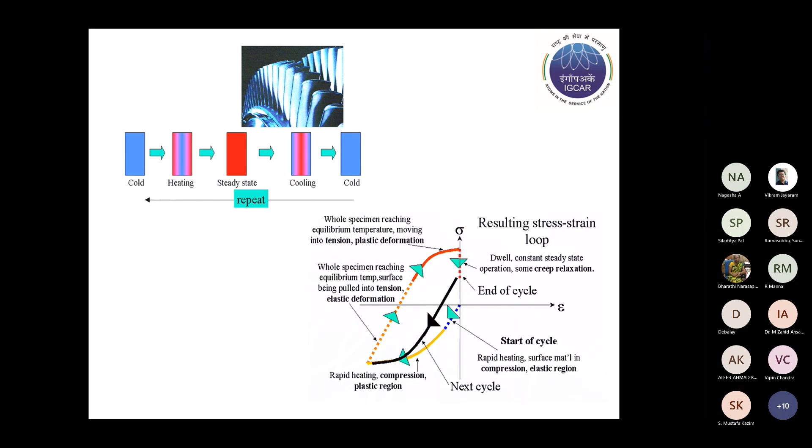At the end of the cycle, at the beginning of the next cycle, the same thing gets repeated, building up a stress-strain hysteresis loop. This is the low cycle fatigue damage that happens during the startup and shutdown cycle of this component. So next, low cycle fatigue.

I don't know why it is continuously changing.

The subject of low cycle fatigue can be broadly classified into two, depending on the temperature of testing. Generally, conventional testing for generating design-related data for high temperature structural materials exposed to fatigue in service relies on isothermal database generated at constant temperature.

Normally, if a structure goes from a minimum temperature to a maximum temperature, the data for design relies on results obtained from the peak or maximum temperature of cycling. The underlying assumption is that the peak maximum temperature cyclic data would give rise to a conservative life estimation.

However, in the recent past, several studies have established that this need not necessarily be a conservative design approach. Hence, there has been a stress in recent years to generate data considering the temperature cycling that is actually happening in service.

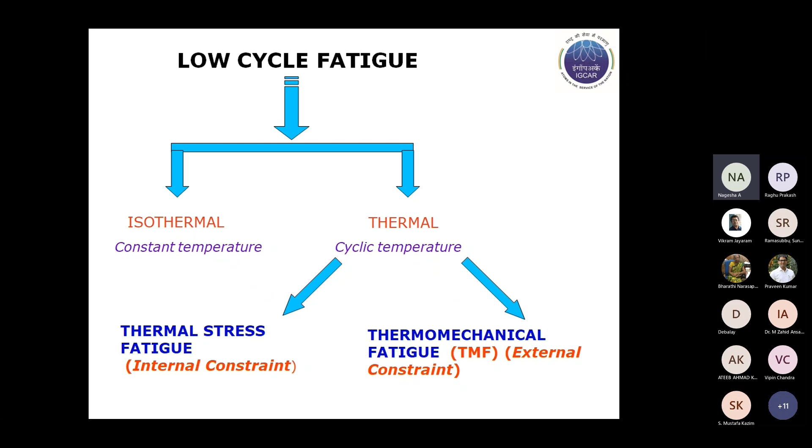So this is a definition, for the sake of completion: it is a gradual deterioration and eventual cracking of material by alternate heating and cooling, during which free thermal expansion and contraction is partially or completely constrained. So as I said, internal or external.

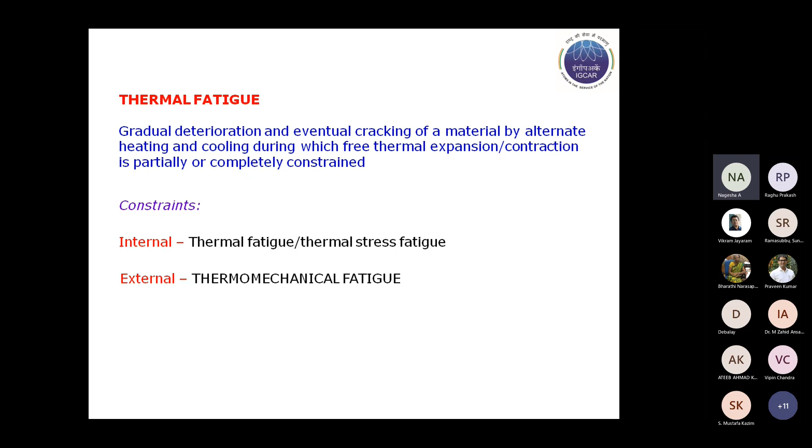Internal constraint is what is happening in the actual thermal fatigue situation. This is also called thermal stress fatigue. And external constraints is the case in thermomechanical fatigue.

So the earliest studies related to thermal fatigue are credited mainly to Glenny and Taylor, where Glenny devised a specific testing technique - this is like turbine blade testing for thermal fatigue. This kind of thing is called Glenny's discs.

And there is a fluidized bed testing facility which was employed for this kind of test, wherein the sample is shifted repeatedly from a high temperature region to a low temperature region. This kind of test is a little bit complex testing setup, and there are drawbacks in measurement of both stress and strain, which is not that simple, because it might require a lot of computational analysis.

Another important drawback is that results obtained from such tests cannot be expressed in a quantitative manner. One can get results related only to a particular specific test specimen or for specific situations. It cannot be used for generating the generic database of thermal fatigue.

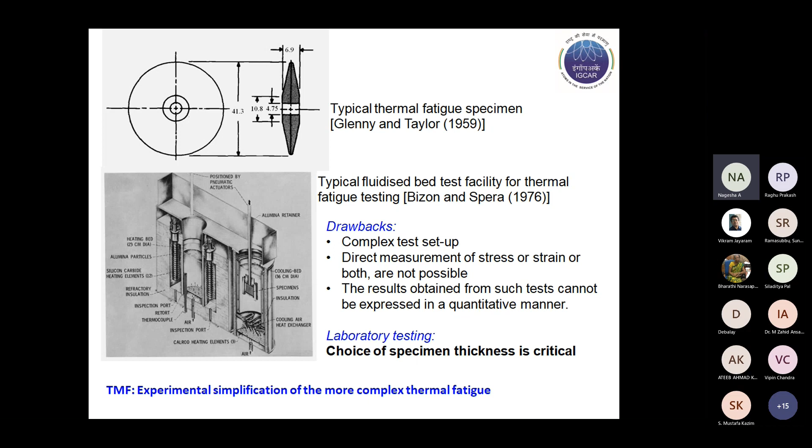So experimental simplification of the more complex fatigue is through the TMF. While carrying out the TMF, there are two extreme and basic temperature strain temperature waveforms deployed.

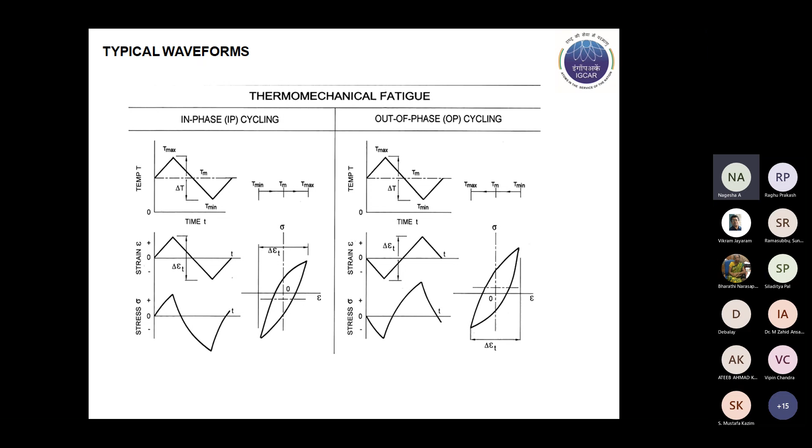One is called IP cycling, wherein with temperature increase, we have the strain going from peak compressive strain to peak tensile, whereas out of phase is the exactly opposite kind of situation. In practice, there could be a different phasing relationship between the strain and temperature in service.

For example, this could be representative of the volume element of any high temperature component. In this case, maybe you can say it is a liquid metal cooled fast reactor pressure vessel, wherein on the outside surface we see an in-phase

Hello? It is not changing.

Is that a heavy slide? Oh, okay.

Okay, so it keeps changing. I do not know really why it is happening.

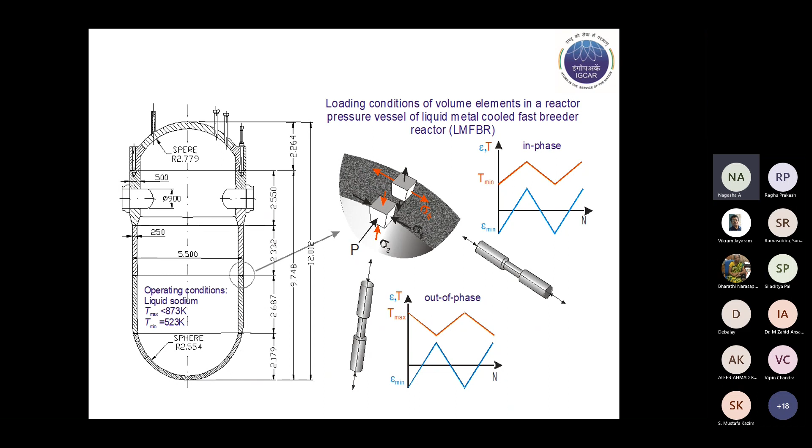It is like in creep-fatigue interaction, where tensile and peak compressive holds are normally investigated. Similarly, in thermomechanical fatigue, it is the in-phase and out-of-phase cyclic waveforms that are normally investigated.

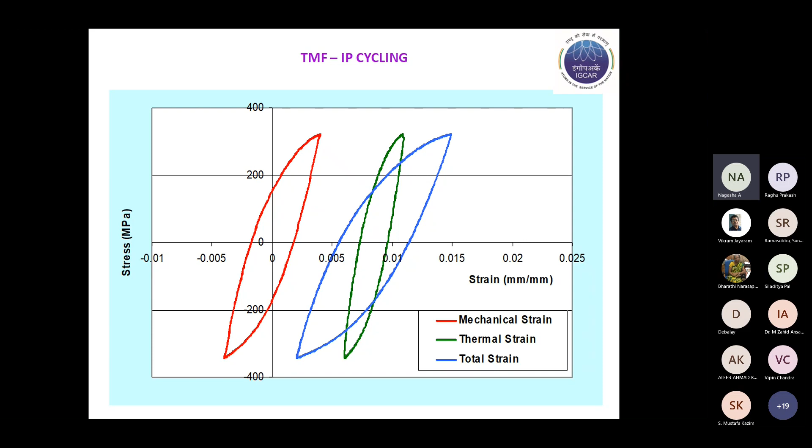As you have seen in the previous slide, this is the in-phase TMF, wherein we have this red hysteresis loop. The mechanical strain is shown in red, the thermal strain is shown in green, and the total strain is shown in blue. Since it is all in phase, we can see that the total strain is the sum of the mechanical and thermal strain.

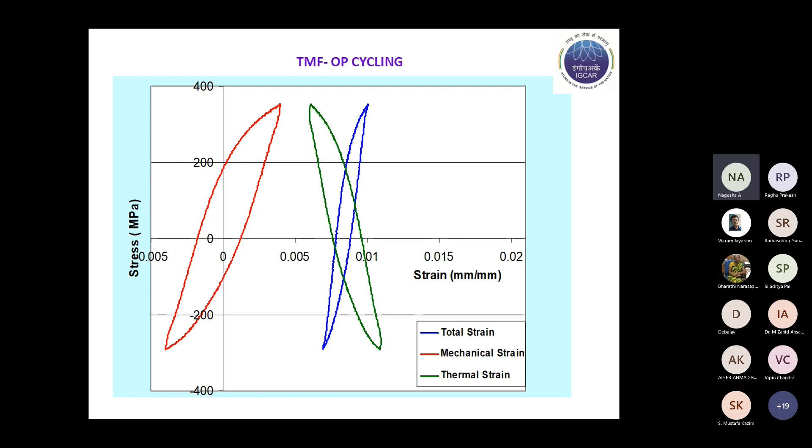In the case of out-of-phase, this is a typical hysteresis loop wherein you see that the temperature and mechanical strain are completely out of phase with each other, and the total strain is also given.

A typical test setup that was used. I'll just give a brief outline about some of our tests carried out on ferritic and austenitic stainless steel, including the weld joints also. This is the typical test setup that was used.

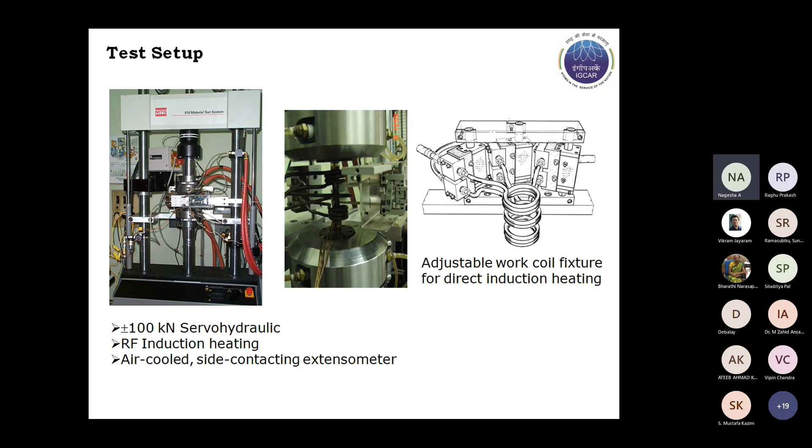We have used a 100 kN servohydraulic testing machine equipped with RF induction heating. For controlling the temperature, for easy control, a three-segmented coil arrangement was used, through which the temperature was maintained within 2 to 3 degree dynamic temperature gradients along the length of the sample.

The type of sample used, normally for TMF one uses a thin sample or a hollow or tubular kind of sample with a very small wall thickness.

In our case, we have used samples with a wall thickness of about 1.4 mm, so that the radial temperature gradients are kept to a minimum, and a gauge length of 25 mm was selected. In the gauge length, dynamic temperature gradients were kept to a minimum, within about 5 degrees throughout the test.

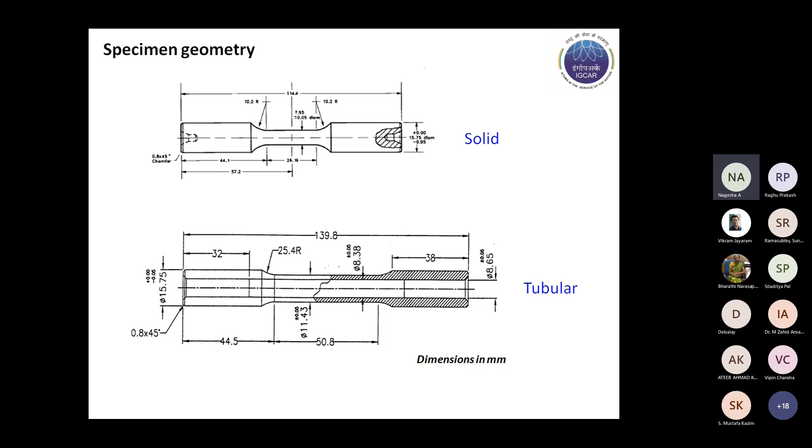When we are doing a completely reversed mechanical strain-controlled TMF test, one needs to compensate for the temperature-induced strain.

This is in practice done in different ways, but mostly time-based and temperature-based compensation procedures are used.

Time-based employs pre-recorded thermal strain versus time, which is constantly accessed during the course of TMF cycling to obtain the real-time thermal strain component. But this kind of approach can possibly lead to control errors if temperature variations are seen; even small variations cycle to cycle can give rise to problems or disturbance in this approach.

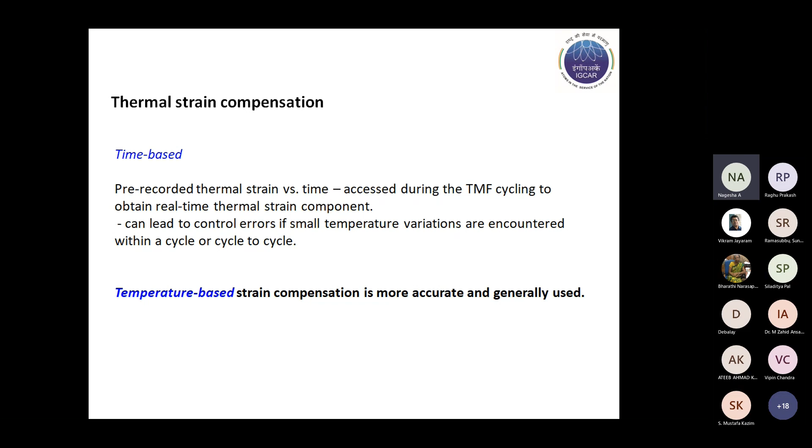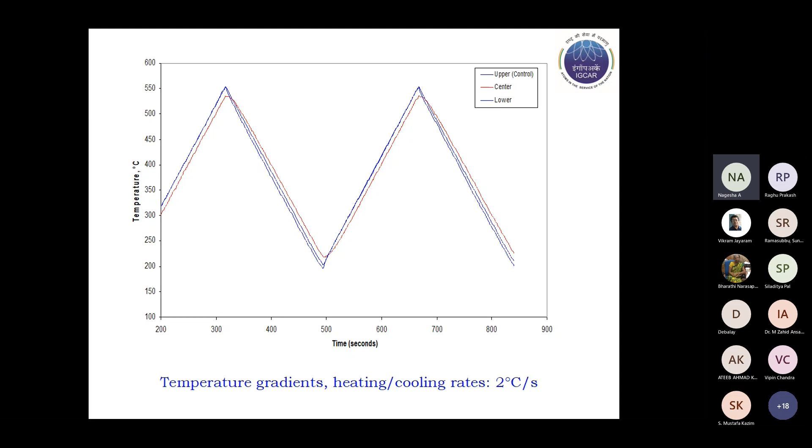So in practice, normally what is used is the temperature-based strain compensation, which is generally more accurate and most commonly used. This is a temperature versus time waveform that we have got on our material.

However, if too much temperature variation is there along the gauge length, then we can get a lot of distortion in the hysteresis loop, where from region to region there could be different local strain happening.

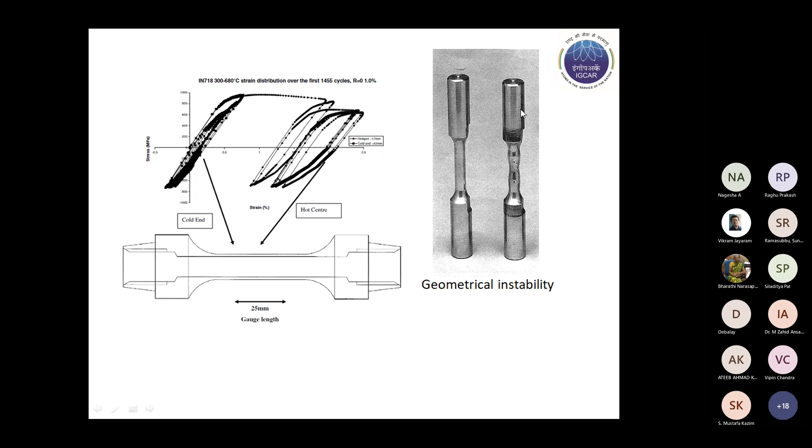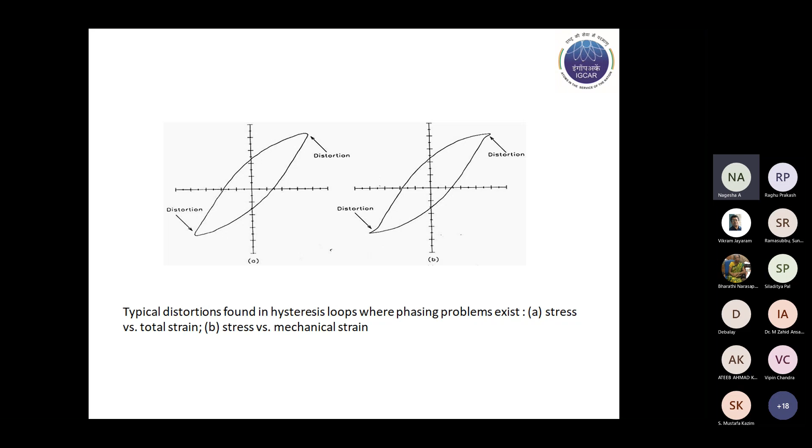So this kind of distortion also manifests in the hysteresis loops, wherein tips can be seen to be either blunted or heavily distorted.

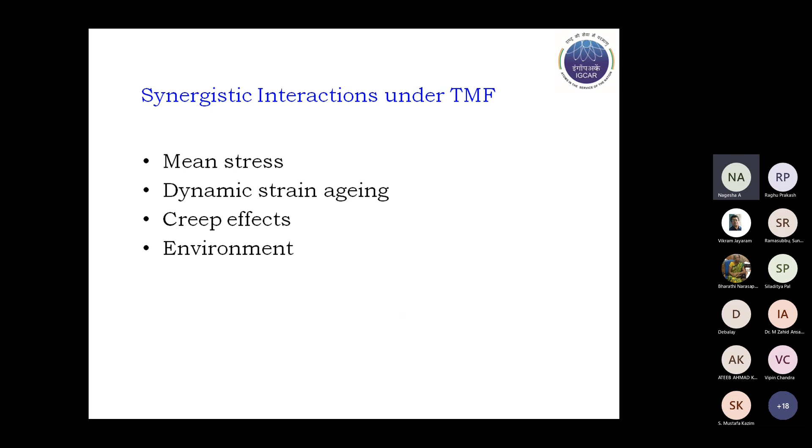So what we have studied, we have given stress on different aspects during the testing - factors such as mean stress, dynamic strain aging, creep effects, and environmental effects, etc., have been investigated systematically.

IP and OP are the most basic and most normally investigated waveforms under TMF. Depending on how the life variation happens between IP and OP, there are different types of cases - mainly 3-4 types.

Type I, wherein IP or in-phase loading gives rise to lower cyclic lifetimes compared to OP. The predominant damage here is creep, because maximum temperature coincides with peak tensile strain. So when creep damage becomes more prominent, this Type 1 situation happens where IP loading gives rise to a lower cyclic life compared to OP.

Whereas in situations when environmental effects predominate, the situation becomes reverse - OP TMF tends to give rise to lower life compared to IP.

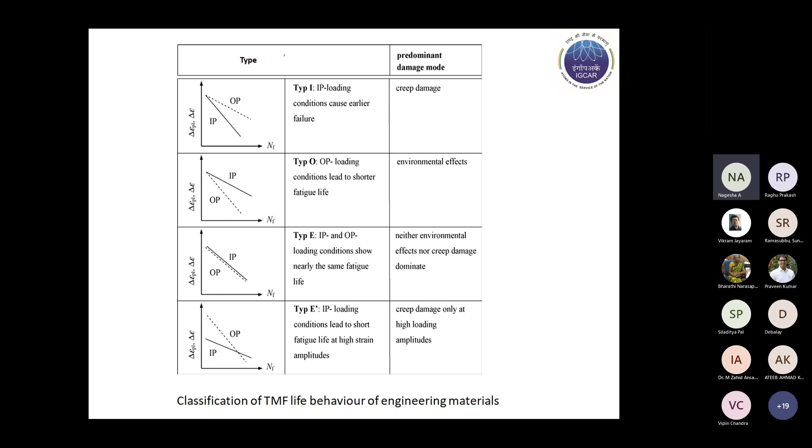There are other two types wherein IP and OP almost give rise to similar lifetimes, where neither environmental factors nor creep damage dominate. And another type of variation called E prime, where IP loading conditions give rise to shorter life compared to OP, and the creep damage occurs only at the high loading amplitudes.

So I'll give some important results which we have obtained on austenitic stainless steel, base metal and weld joints, and ferritic 9 chrome varieties of steels.

We have investigated 9 chrome moly steel and reduced activation ferritic martensitic steel, which are respectively used - 9 chrome moly steel is the material for the steam generator components of fast reactor, whereas there is another type of similar steel which I'll come to a little while later.

In both of these materials, we have carried out IP and OP-TMF tests, and the strain rates employed compared to isothermal cycling are far lower - about a couple of orders of magnitude lower in the case of thermomechanical loading, because of the requirement of temperature cycling and minimization of temperature gradients. This limits the maximum strain rate that can be employed.

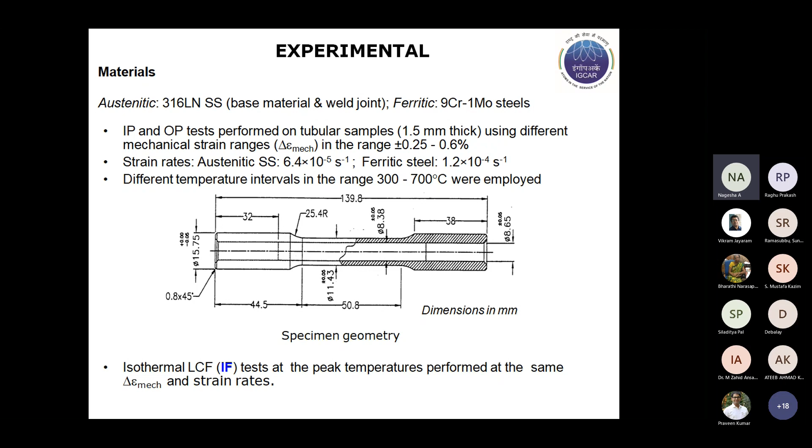In my presentation, I will use the term IF cycling to denote the isothermal testing. So when I'm comparing this isothermal testing, I would always compare it with respect to the maximum temperature of the TMF.

Strain compensation was done using a procedure wherein the free thermal expansion under zero load during the initial ramp from ambient temperature to Tmax was enabled, and thermal cycling was introduced between minimum and maximum temperature, allowing free expansion and contraction of the specimen. So the strain recorded by the extensometer is the pure thermal strain, obtained as a function of temperature, and the strain-temperature relationship was established and used to continuously calculate and control thermal strain during the test.

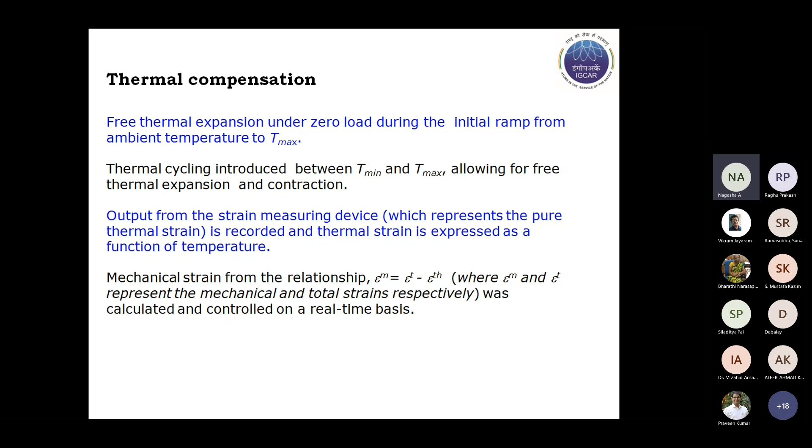From the total strain sensed by the extensometer, the thermal component was calculated and continuously subtracted, and the remaining part - total minus thermal strain, that is the mechanical strain - was continuously recorded, calculated and controlled on a real-time basis during the test.

Compared to isothermal cycling, there is an additional degree of imbalance on the stress-strain hysteresis loop compared to the situation under isothermal condition.

Under isothermal condition, the tensile and compressive parts of the stress-strain hysteresis loop would be symmetrical, but in the case of thermal TMF, there is an asymmetry in the tensile and compressive parts because of the differing temperatures during the tension and compression strain of the cycle.

During the high temperature part of the cycle, the material will be deformed by plasticity and creep, provided the maximum temperature is high enough. But this deformation is applied to material that has just undergone half a cycle of cold working during the lower temperature deformation, which makes the material a little bit stronger in the tensile part compared to what happens in isothermal cyclic loading - so the flow response will be higher.

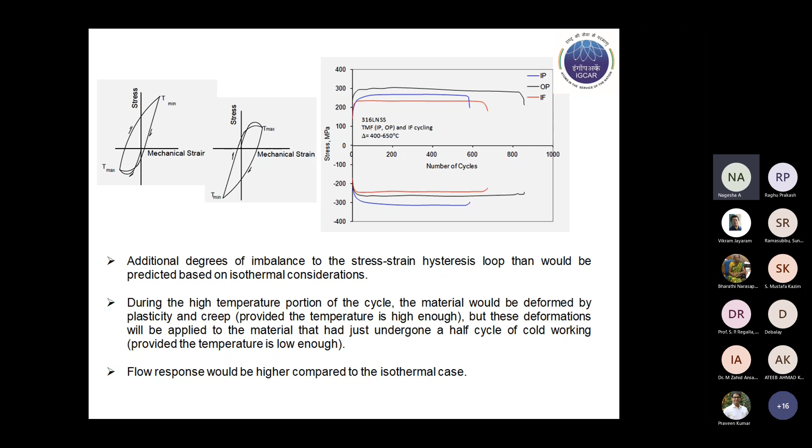Higher compared to the isothermal case, and similarly in the lower temperature part, because the temperature is lower, it will make it stronger in the compressive part also. So both the compressive and tensile parts, the response stress will be seen to be higher compared to the isothermal equivalent test at the maximum temperature of cycling.

This typical results from the IP and OP TMF are shown here, and we can see from this figure the mean stress variation because of the temperature difference.

Normally the out-of-phase TMF leads to a tensile mean stress, as against the compressive mean stress observed under IP cycling. The compressive mean stress under IP cycling occurs since the compressive deformation is taking place at the lower temperature, giving rise to higher stress compared to the lower stress happening at the maximum temperature during IP cycling.

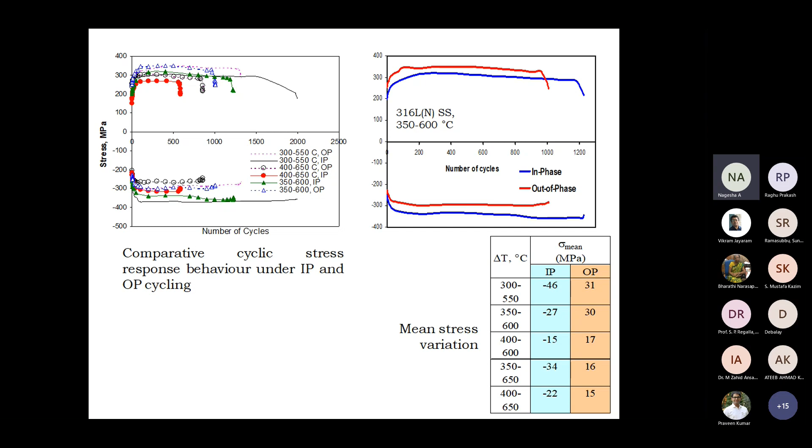So this sets up a tensile mean stress under OP because we have a cold lower temperature coinciding with peak tensile loading. So OP gives rise to tensile mean stress, and IP gives rise to compressive mean stress. This has a bearing on the life variation as well.

When we plot the cyclic life versus maximum temperature, we see that below a temperature of about 650 degrees centigrade, out-of-phase led to a lower cyclic life compared to in-phase. Whereas with increase in temperature beyond 650 degrees centigrade, in-phase TMF gives rise to a lower life compared to OP. What is happening is, with an increase in temperature, the creep deformation was found to be more pronounced, leading to a life reduction in comparison with out-of-phase.

Whereas when the temperature is lower, the tensile mean stress which is built up under OP-TMF proved more damaging rather than the creep damage.

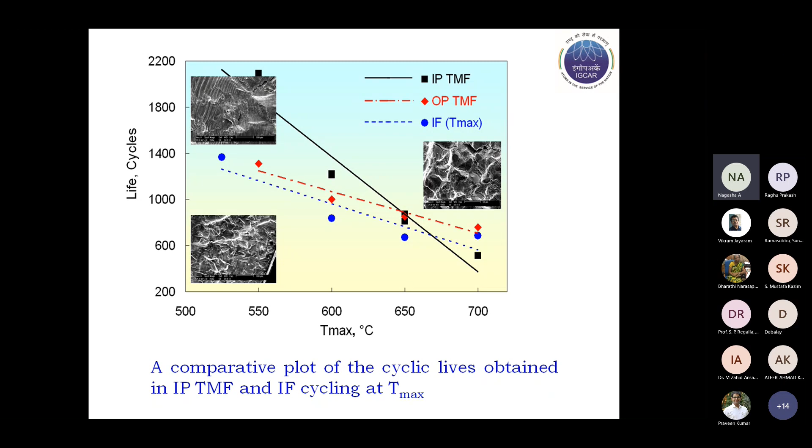An important observation from the viewpoint of design is that TMF gave rise to a lower life compared to isothermal cyclic loading. This signifies that the traditional design approach is not conservative for these materials, and this similar situation is the case for both the base metal as well as the weld joint. Across the temperature range of 623 through to 873 K, that is 350 to 600 degrees centigrade...

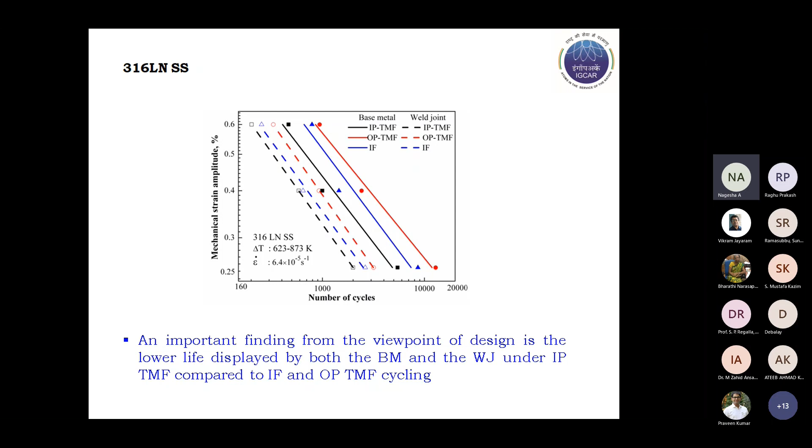As a function of mechanical strain, the cyclic life variation is presented here. For both the base metal as well as the weld joint, the life under in-phase TMF is shown to be the lowest, and the isothermal cycling at the maximum temperature gave values almost in between the values displayed by the IP and OP-TMF conditions.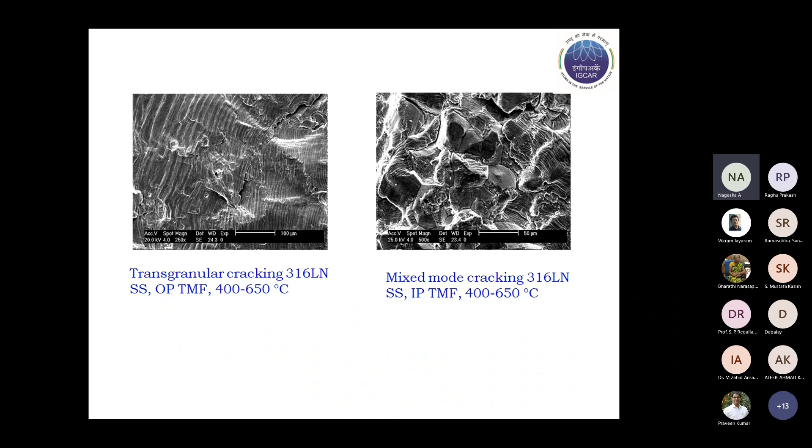The creep damage happening under in-phase cycling was reflected in the form of extensive grain boundary cracking induced by creep damage. Mostly the OP cycling resulted in pure transgranular cracking without much creep damage, whereas there is mixed mode largely dominated by creep cavitation-type damage under in-phase TMF.

We have investigated 316LN with various nitrogen contents also, in order to establish the optimal nitrogen content for best performance under TMF and creep fatigue interaction, etc.

Similar is the situation across all the nitrogen contents. Here one can see the extensive grain boundary damage in case of IP cycling, compared to mostly mixed mode dominated by transgranular cracking in the case of isothermal and also in the case of out-of-phase TMF.

So the important thing is, even though the average temperature is much lower in the case of TMF, significant creep damage accumulation still occurs.

One reason for this could be that in the isothermal case, some of the damage happening in the maximum tensile part gets reversed during the compressive part of the cycling. But in the case of TMF, for example in the IP-TMF, the maximum tensile stress happens coincident with the maximum temperature.

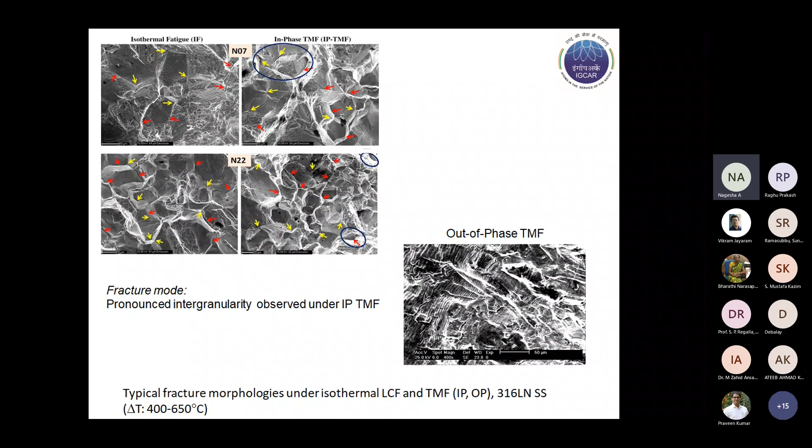As temperature was increasing, the dislocation structure changed to a wall-like or cell-like type of arrangement. These steels are very much prone to dynamic strain aging, with effects peaking almost in the temperature range of 550 to 600 degrees centigrade.

This is reflected generally in the form of planar, widely spread planar slip bands in this alloy. But as temperature is increased, the tendency for cellular dislocation structure happens, cross-slip happens, and this leads to formation of dislocation cells, which is seen at higher temperature TMF, and also under IP-TMF cycling.

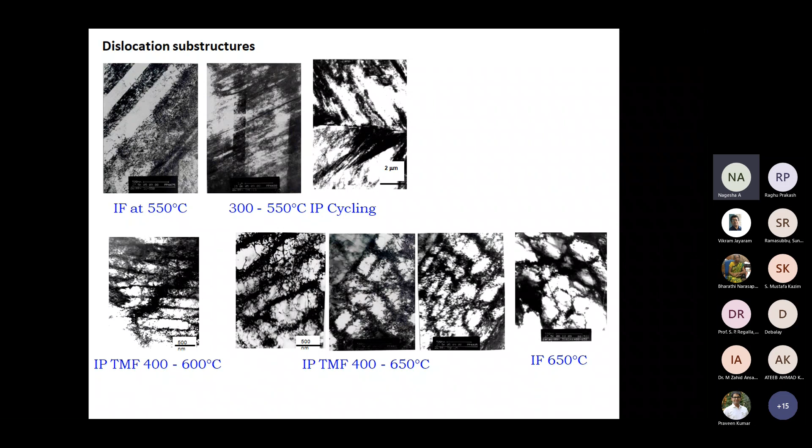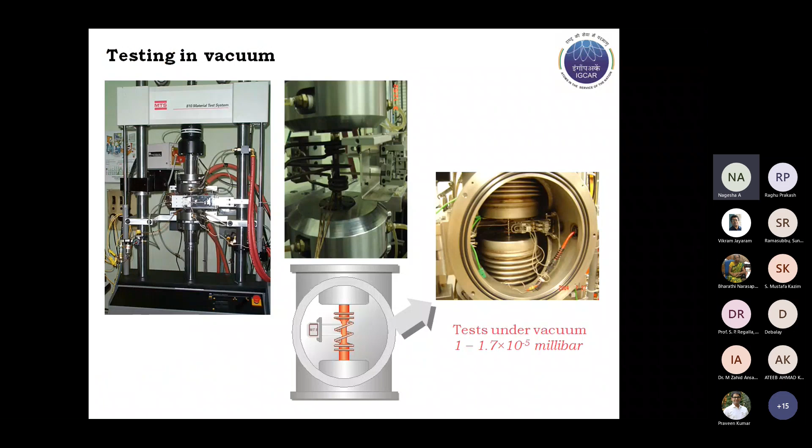We can see from this that the reduced environmental influence is much less under IP-TMF as against or in comparison with OP-TMF. This suggests creep domination in IP tests, because the life difference is not much in air compared to what is happening in the vacuum situation. The IP is largely governed by creep deformation, so in vacuum there is not much of a difference compared to air, as against the case with OP-TMF, wherein a large difference is seen.

And in fractography also, here we saw extensive signature of creep damage, which manifested in the form of mixed mode fracture under 400 to 650 IP-TMF.

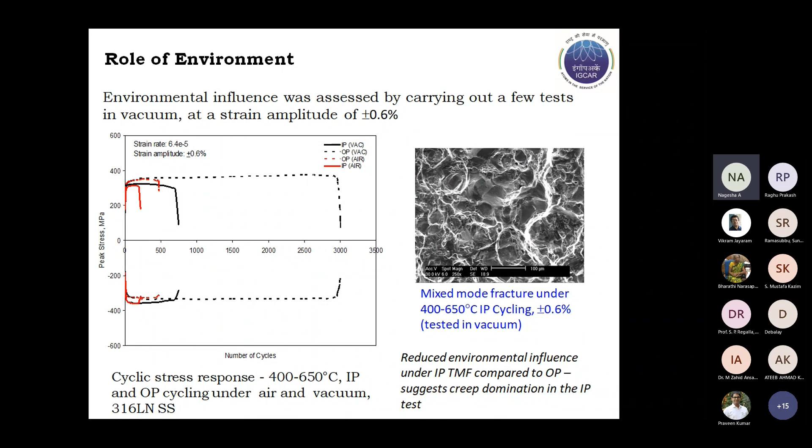Coming to the steam generator material, the ferritic martensitic steel, 9 chrome 1 moly, 0.25 vanadium, and a little bit of 0.1 niobium steel. Due to higher thermal conductivity and lower thermal expansion, this material is normally preferred for the steam generator components of the FBR. It gains strength mainly through three important factors: the lath martensitic structure, finely dispersed and distributed carbide particles, and the high dislocation density characteristic of these materials.

Now, when it's exposed to high temperature, all these factors change. The precipitates have a tendency to grow, and this leads to restructuring of the martensitic laths. The lath structure undergoes change, gets structured into a kind of cellular structure, and breakdown of the laths occurs. This leads to a reduction in strength, and the dislocation density also continuously comes down. All these factors lead to a reduction in the strength of the material.

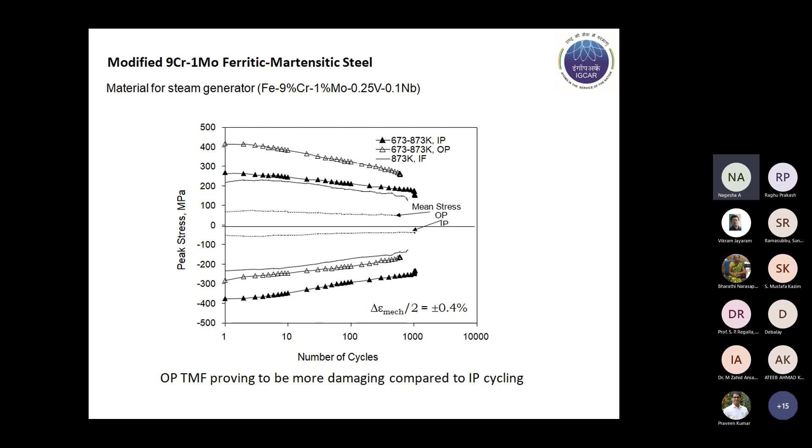This was investigated under isothermal, in-phase, and out-of-phase cycling at different strain amplitudes. In this case, as against the life variation observed in austenitic stainless steel, where IP cycling gave rise to a lower life, the situation here was slightly different. Out-of-phase cycling led to a lower lifetime compared to in-phase, again across all the temperatures investigated.

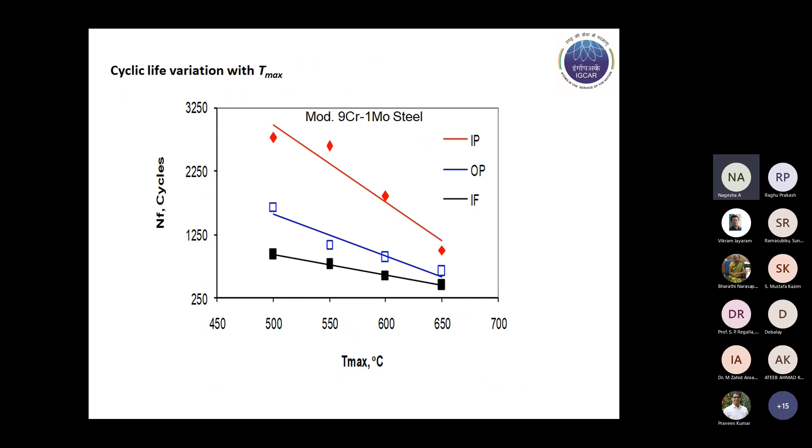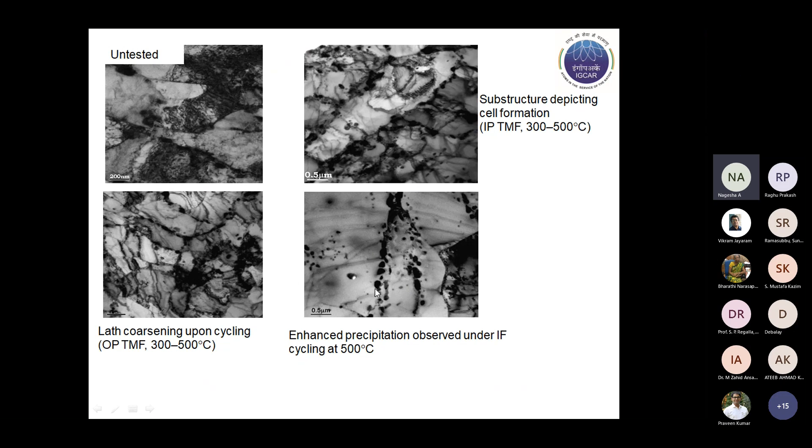So this is a typical substructure. As I said in the earlier slide, the martensitic lath structure in the untested condition can be seen, whereas it gets restructured and subcell substructure formation happens under IP cycling, with coarsening of the laths, etc. Enhanced precipitation is also observed. These are probably the prior martensite laths, which are replaced with a lot of precipitation happening inside.

Another material was also investigated, referred to as lower or reduced activation ferritic martensitic steel. It is a slight modification of the 9 chrome 1 moly type of steel, where molybdenum is replaced with tungsten, and niobium is replaced with tantalum, because this is a structural material for fusion reactor application, for the test blanket module and the first wall, plasma facing component of the fusion plant.

As we know, elements such as molybdenum and niobium give rise to very long-lived isotopes that make the structural materials highly radioactive during operation. Hence, to reduce long-lived isotope formation, it is normally recommended to replace molybdenum and niobium with low activation elements, generally tungsten, vanadium, and tantalum. In this material also, we have done systematic investigations on isothermal and thermomechanical fatigue.

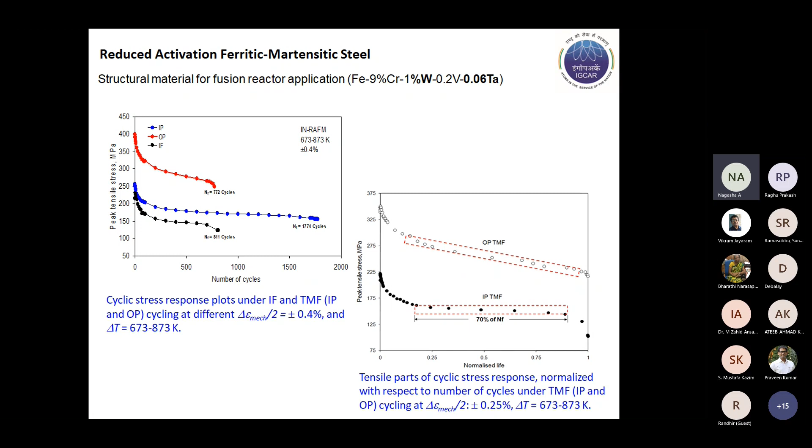We can see the out-of-phase TMF leading to lower life compared to both in-phase and isothermal loading, where you can see accelerated softening happening in OP TMF in comparison with both the IP case as well as the isothermal cyclic loading. This is related to something I will come to a little later.

This is also actually related to the oxidation-associated damage, which will be seen in the next few slides. And there is also another factor leading to lower cyclic life under OP, in the form of extensive cracking noticed under OPTMF in comparison with IP.

In the case of IP loading, the cracks were lesser in number, and the tips were relatively blunt compared to the out-of-phase cycling. Here there was more density of surface cracks, and the crack tips were found to be much sharper compared to the case with IP loading.

This is because the combination of maximum temperature and tensile loading blunts the crack to a greater degree compared to what happens in the case of OPTMF, where the peak tensile loads occur with the lower temperature part of the cycle.

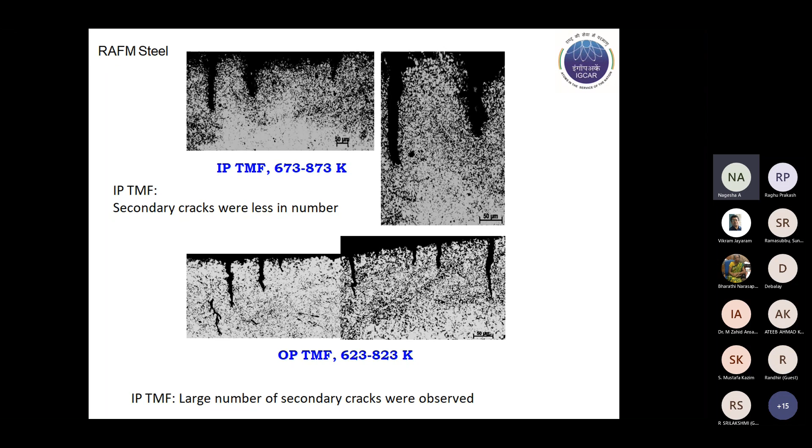Typically, in the case of IPTMF, the maximum tensile stress happens at the maximum temperature. Here the oxide forms at the peak tensile load at the maximum temperature. When you reverse the strain, the oxide layer gets spalled off.

In comparison, cracking of the oxide layer takes place differently in out-of-phase cyclic loading, where maximum temperature occurs at the peak compressive strain. The oxide formed at the peak temperature at maximum compressive strain, when subjected to tensile strain during the changeover, gets cracked widely. So this gives rise to a lot of damage associated with oxide cracking in OPTMF.

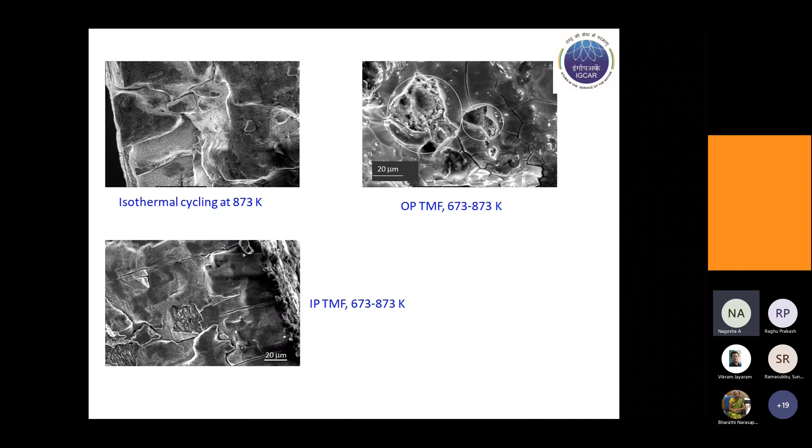As against the situations in isothermal and IPTMF cases, substantial cracking of this oxide layer coupled with significant internal cracking and internal oxidation is seen in the case of OPTMF. This is coupled with the occurrence of mean tensile stress, because tensile stress is much higher in OP compared to IP.

You can see in this figure the tensile stress is much higher compared to the other two cyclic loadings. So a combination of the oxidation-induced damage and the higher tensile stress gave rise to a lower cyclic life in the case of OPTMF in these materials. It was the case both with the 9 chrome 1 moly steel as well as the reduced activation ferritic martensitic steel.

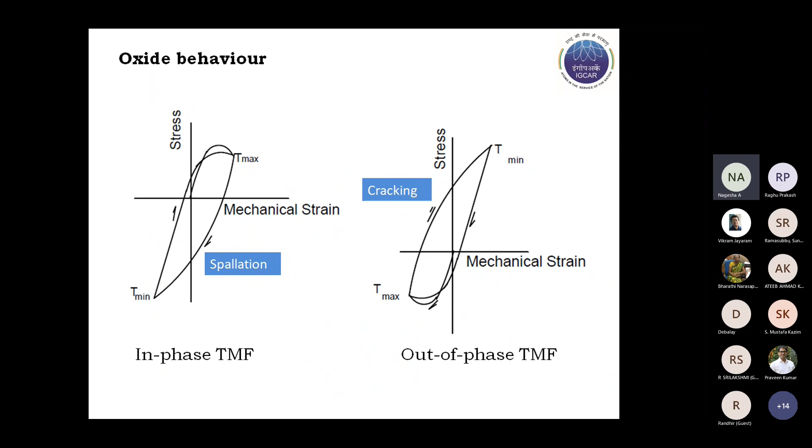There's another important result I would like to show: the occurrence of serrations in this loop, that is, in OPTMF, the dynamic strain. This alloy is prone to the occurrence of dynamic strain aging in the temperature range of about 400 to 500 degrees centigrade.

In OPTMF, this happens on the peak tensile side, where the tensile direction is colder. The serrations were seen largely in the tensile part under OPTMF, and depending on the temperature traversed during testing, the nature of the serrations also changes.

Lower temperature serrations are generally of A type, and with intermediate temperatures they convert into B type, and in the higher temperature regime we normally see C type serrations occurring. So all this happens during cyclic loading, and depending on the temperature traversed, the type of serrations keeps changing from A to B to C.

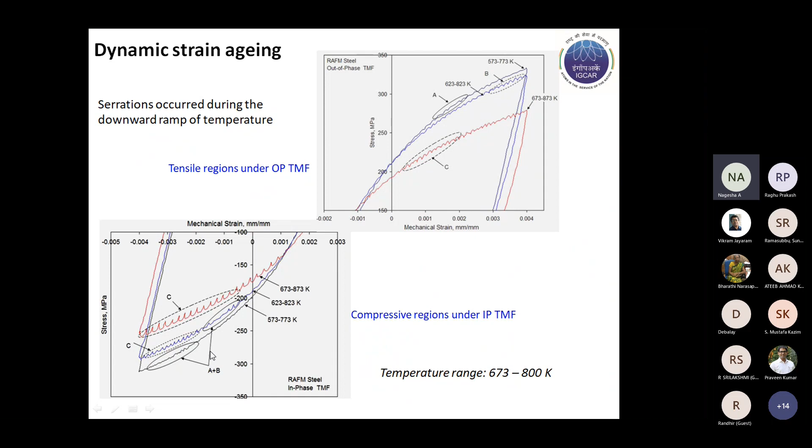Similarly, in the compressive parts of the stress-strain loop under IPTMF, similar kinds of serrations were seen. The occurrence of all these three mechanisms contributes to reduced cyclic life under the OPTMF case.

Some tests were done in vacuum as well, and as you can see, the continuous softening that happens in air is not there when tests are conducted in vacuum. This precisely identifies the damage due to oxidation that is happening, and the lower life under OPTMF seen in air is not there in vacuum tests.

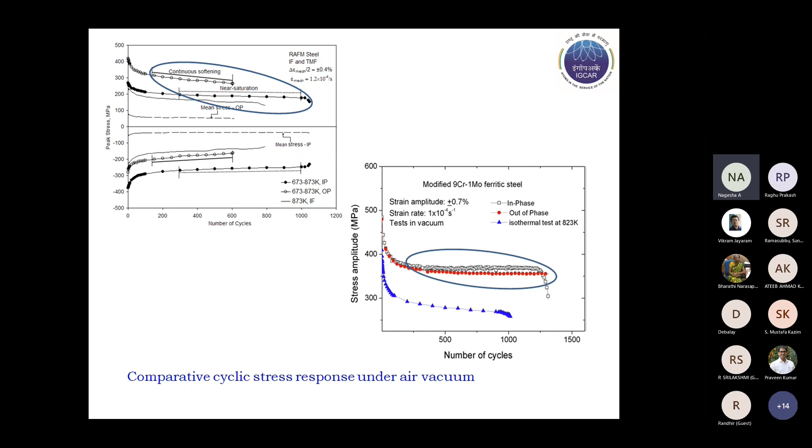In vacuum, we saw that OPTMF has a slightly higher cyclic life compared to the IP case. A corollary can be drawn from our earlier tests conducted in liquid sodium environment, wherein in air environment we saw results from isothermal creep-fatigue interaction tests carried out earlier.

This is not related to TMF, but since it has connection with the present results I've just shown: in air, we see that compressive hold time gave rise to a lower cyclic life, whereas the compressive hold showed a higher life when tests were done in sodium.

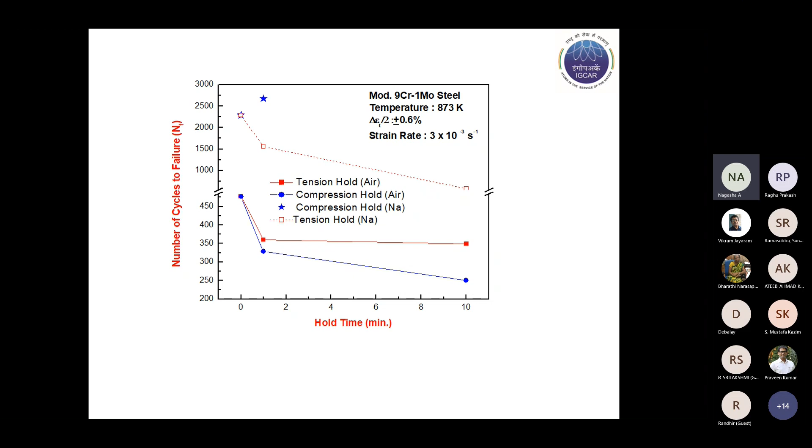So the creep contribution could be clearly seen. It can be related to creep damage purely, not related to any damage due to the oxide or environmental effects. In sodium, the cyclic life was higher in tests done in the compression hold.

Coming to the creep fatigue interaction, we have done few tests on the traditional or conventional CFI, isothermal CFI, comparison with the creep TMF loading, wherein we have incorporated hold times at the peak temperatures, and looked at the cyclic life variation between creep TMF and creep isothermal creep fatigue interaction.

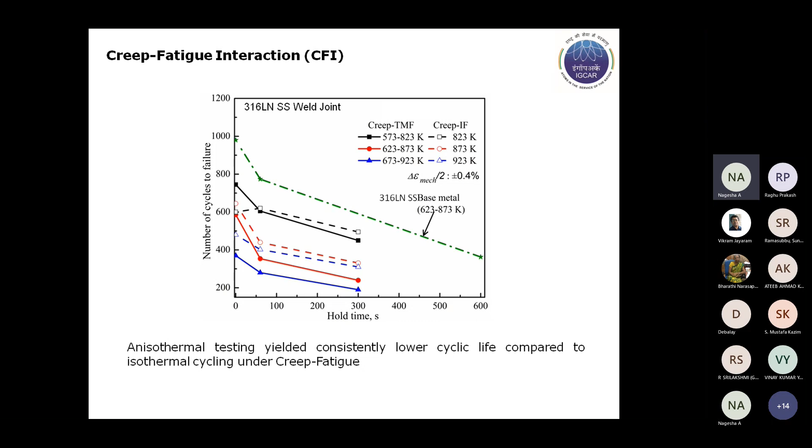We have seen that creep TMF shows a lower cyclic life compared to creep IF, or isothermal creep fatigue. For all the temperature ranges investigated, creep TMF led to consistently lower lifetimes compared to the peak constant temperature creep fatigue.

This is similar to earlier results for creep IF, or normal isothermal creep fatigue. This gives the difference in the fracture morphology between creep isothermal and in-phase.

In-phase creep TMF, similar to what was noticed in the continuous cyclic tests, gave rise to substantially more creep damage that reflected in the form of creep cavitation and triple point cracking on the fracture surface.

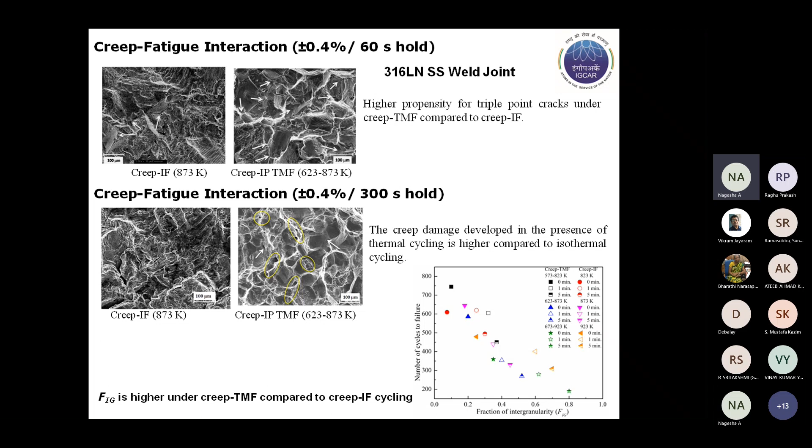We have examined the fraction of intergranularity, which was consistently higher in the case of creep TMF compared to creep IF cycling. This has similarly been done, though I have not shown it, in the case of continuous cycling, where similar observations were made.

I will just give a brief outline of the modeling of the hysteresis loops which we have attempted. We try to predict the hysteresis loops under thermomechanical fatigue using the isothermal database, for which a simple model proposed by Skelton Webster was employed.

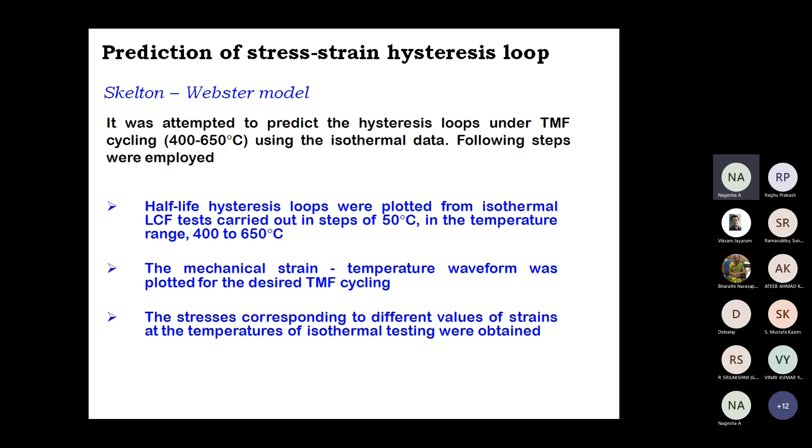We carried out isothermal tests at various temperatures in steps of 50 degrees, from 400 to 650 degrees. The mechanical strain versus temperature waveform was plotted for the desired TMF loading, and stresses corresponding to different strain values at the different temperatures of isothermal testing were obtained.

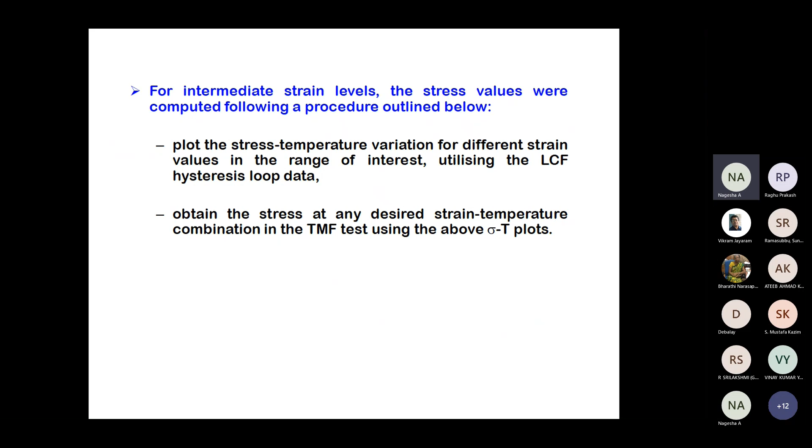This gives rise to only a few points, but for the intermediate strain levels, we have plotted the stress-temperature variation for different strain values in the temperature range using the LCF or isothermal LCF hysteresis loop data. Stresses for any desired combination of temperature and strain were obtained using these stress versus temperature plots from the previous step.

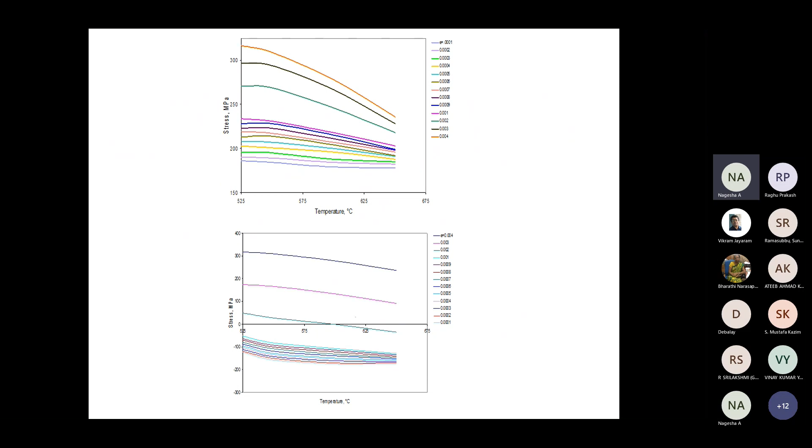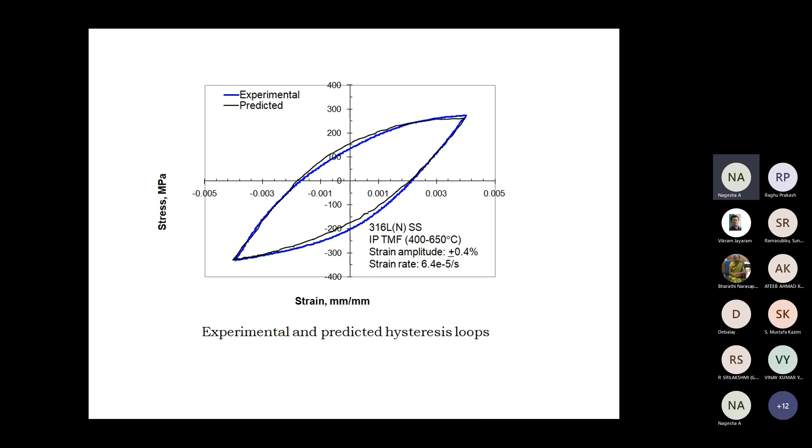This stress versus temperature was plotted for different strain values along both the ascending and descending parts of the hysteresis loop. We have got somewhat satisfactory prediction of the hysteresis loops under thermomechanical fatigue based on the data obtained from the series of isothermal tests carried out at different temperatures in the range of 400 to 650.

We have also tried to employ a couple of models for prediction of cyclic life under TMF. One of them is the frequency modified damage function approach proposed by Ostergren. This is a slight modification of the Coffin-Manson relationship, where the fatigue life is represented as a function of the maximum stress, plastic strain, and the frequency of cycling.

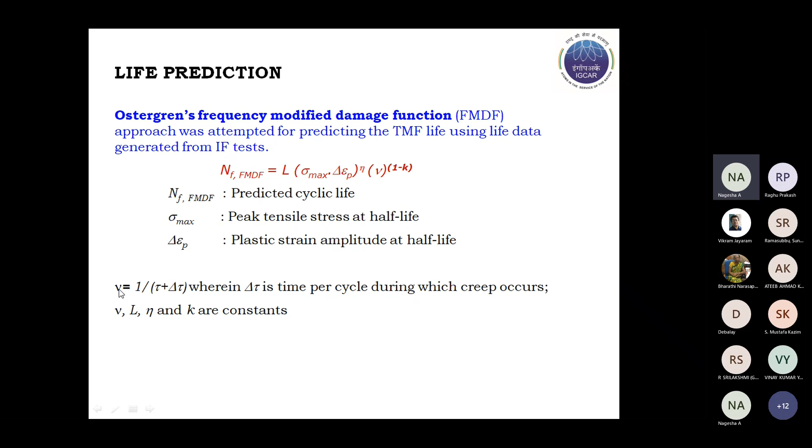The predicted life is represented by this equation, where the frequency is 1 by tau plus delta tau, whereas delta tau is the time per cycle during which creep occurs. So in-phase, we have taken the time it takes to go from the creep dominant temperature—say in the case of 316LN, it's almost like 550 to 650—what is the time taken for traversing this temperature range. That has been taken to arrive at the effective frequency, which is the new term here, and the others are constants.

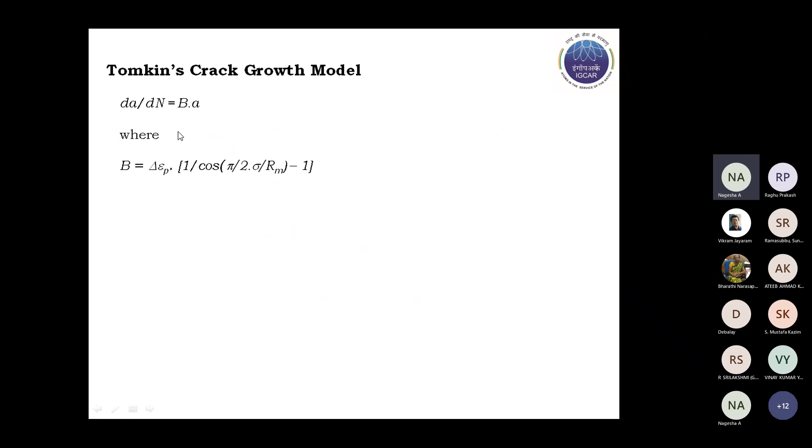Another approach was also used, a crack growth model proposed by Tomkin, where the crack growth rate is represented as B into A, where B is given by an expression as a function of stress and plastic strain. Sigma is the maximum response stress, and Rm is the UTS at the temperature where the peak tensile strain occurs. For this calculation, we have assumed an initial crack length equal to the grain size.

These approaches were used for 316LN stainless steel, which had a grain size of 75 microns. This was assumed for the initial crack length, and the final crack length was taken as 1.2 mm.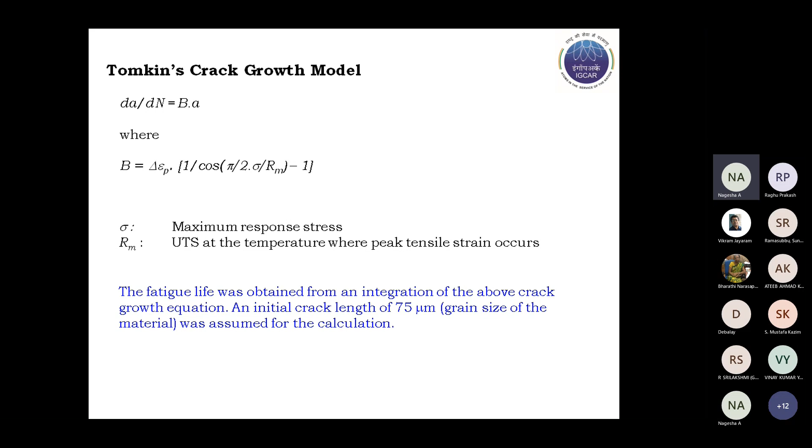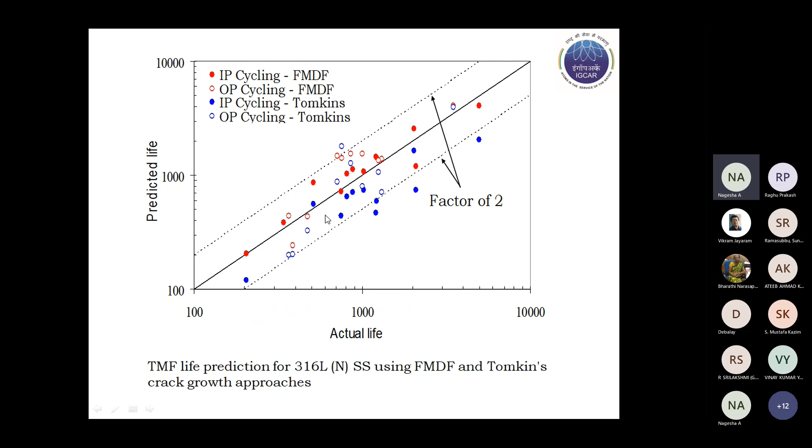From the tested samples, we have seen that when the crack length reaches 1.2 mm, fracture of the sample happens. So that was taken as the final crack length, and we can see that both these techniques gave rise to prediction of cyclic life largely within a factor of 2, for 316LN stainless steel.

Now coming to conclude my lecture: Isothermal LCF led to lower cyclic life compared to TMF at maximum temperature. And with increasing temperature, the difference in life was narrowed down.

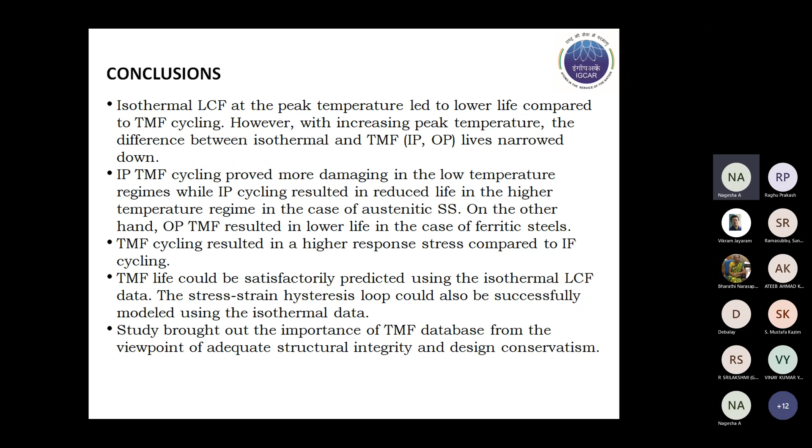Also, the loop could be predicted based on this. Importantly, the study brought out the importance of the TMF database from the viewpoint of structural integrity and to establish adequate design conservatism in materials, which was applicable to both austenitic as well as ferritic steels, including the austenitic SS weld joints.